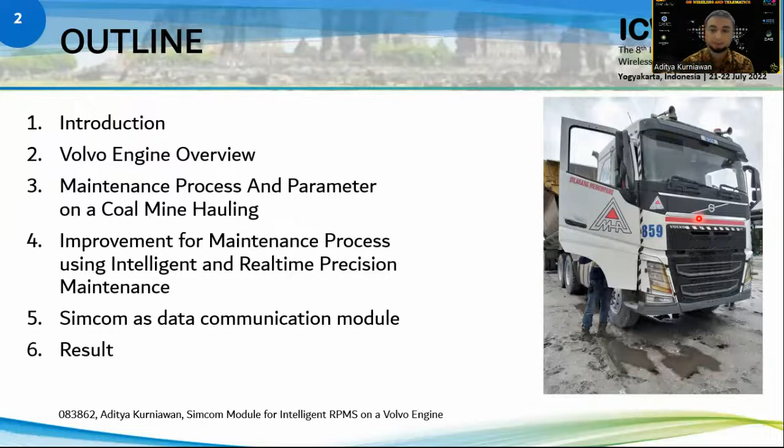So it stores the coal that is created by the industry, the mining industry. So this is just like a big storage.

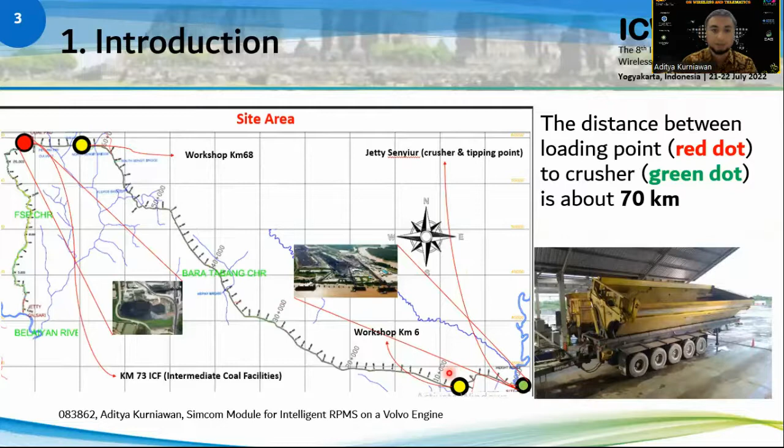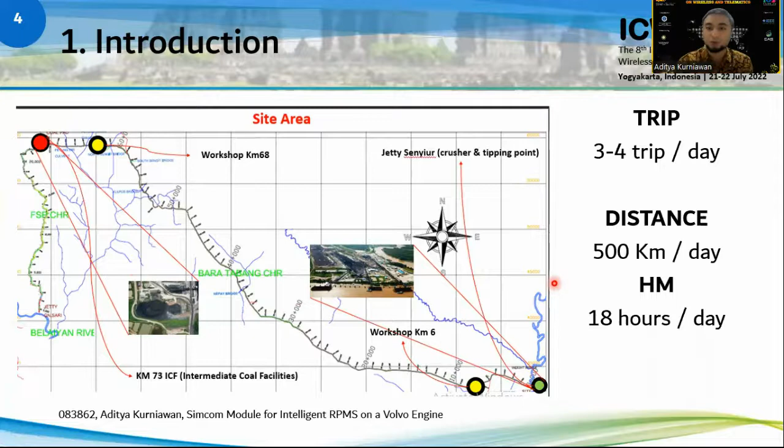And the distance between the loading point, the red dot, and the green dot is about 70 kilometers. The trip done by the unit has to move from the red dots, the intermediate coal facility or loading point, to the tipping point, about 70 kilometers, and it has to do this trip about 3 or 4 trips a day.

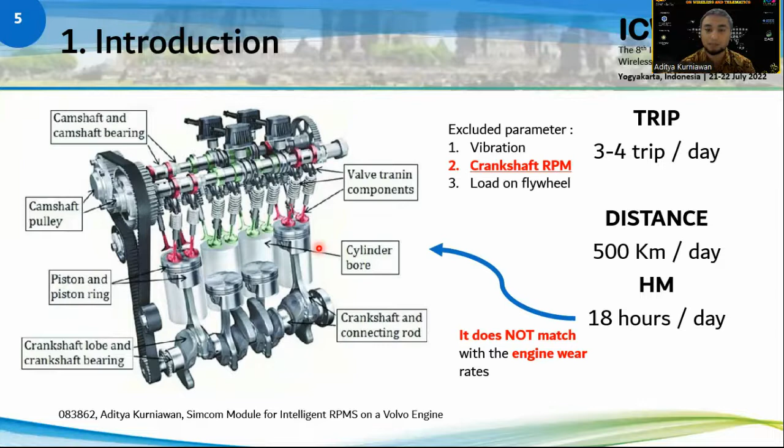And this is the Volvo engine. Inside the Volvo engine is installed what we call a magnetic pickup sensor. So the sensor will read the RPM of the engine, how many rotations the engine has made, and this engine speed - for example, this one, you can read it through the dashboard.

So you have to connect this dashboard with the laptop, with your computer and adapter from the Volvo Tech Tools, and then you can read this engine speed in RPM. So this value is actually what we're looking for.

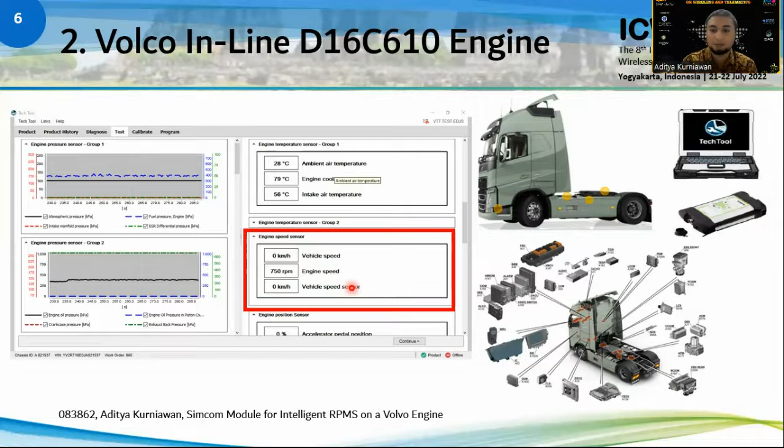In this research, we try to pick up this data of engine speed and send it wirelessly using the Simcom modules. This is how it works, the maintenance process and parameters before the implementation of this research.

The engine hour is just counting how many hours the engine is running. This is the input of the maintenance process, using schedules, then doing maintenance by the hours. For example, periodic service at 250 hours, 500 hours, 1000 hours, and so on. By using this data, the mechanics will do the periodic service based on the hours of the engine.

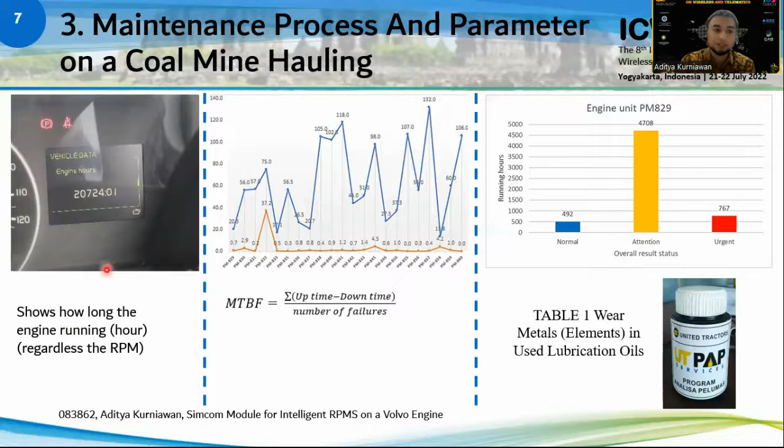Using this scenario, it will let the maintenance schedule be done correctly. So that is how the improvement works. We just try to replace the parameters from before. Before the implementation of the research, they used this hour meter, and now they use this new parameter.

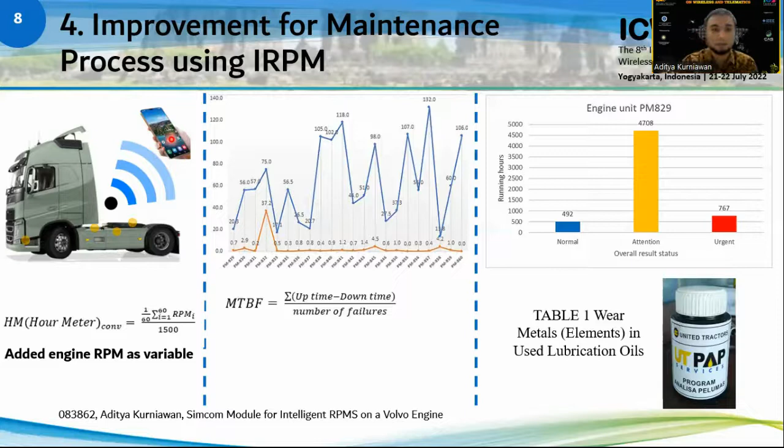The converted hour meter is directly taken from the RPM of the engine and from the sensor of the engine, and sent directly to the phone using an app, which we developed using Blynk apps like this.

This is the Simcom data communication module, which we install here inside the Volvo FH16 prime mover. We unplug this cable and put in a new module using the Node MCU here, and we take the sample of the engine RPM data.

We send it wirelessly using the Simcom A7600C1 LTE module, and use the RTC as the real-time clock. It will send the RPM data to the maintenance schedulers every 1 hour. So in 24 hours we have 24 data points of RPM and hours.

So the hours before will be corrected by the RPM of the engine, because before the hour meter doesn't really calculate the RPM of the engine. Now using this module, the hour meter is also calculating the RPM of the engine.

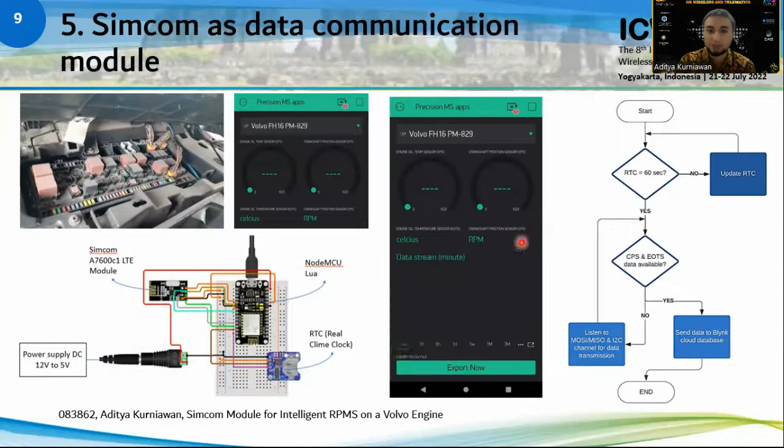After 1 month using this scenario, the value for MTBF, or mean time between failure, is getting better, about 1.8 hours. It means the unit is broken down rarely compared to before.

In a period of a month, in January 2022, the engine oil unit for PM 829 where we implemented this research has spent 100% of its total running hours in normal status. The month before, the unit was running with attention status, meaning the engine was in danger, but now it's in normal status compared to the year 2021.

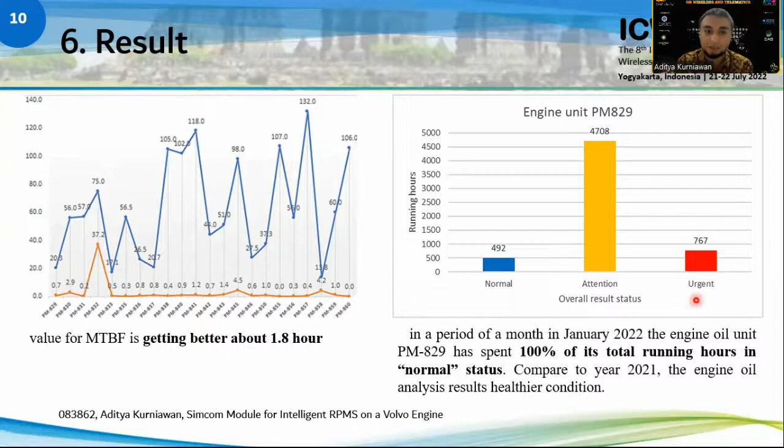The engine oil analysis results mean it is in healthier condition after the implementation of this research. The summary is the device prototype has been installed and tried in a real-world environment and has been proven to raise the value for MTBF by about 1.8 hours.

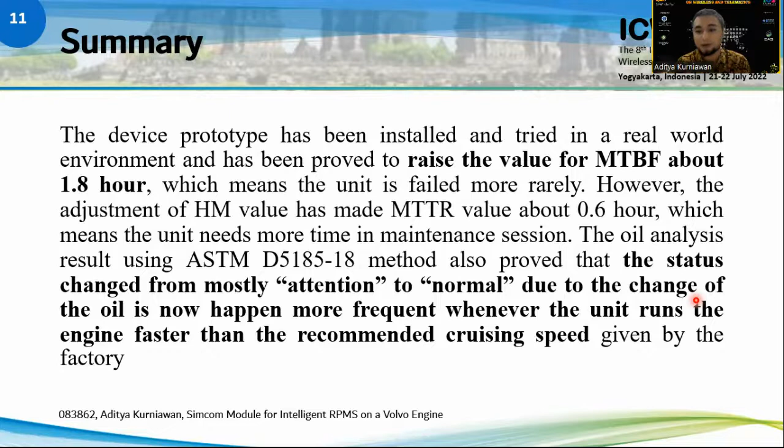The oil sample status changed from mostly attention to normal due to the oil change now happening more frequently whenever the unit runs the engine faster than the recommended cruising speed, which is 1500 RPM given by the factory.

So that is the suggestion, and for the next project we probably will try to detect the engine wear components further, so that the hour meter value could represent the real engine wear, by implementing the engine load parameters in real time.

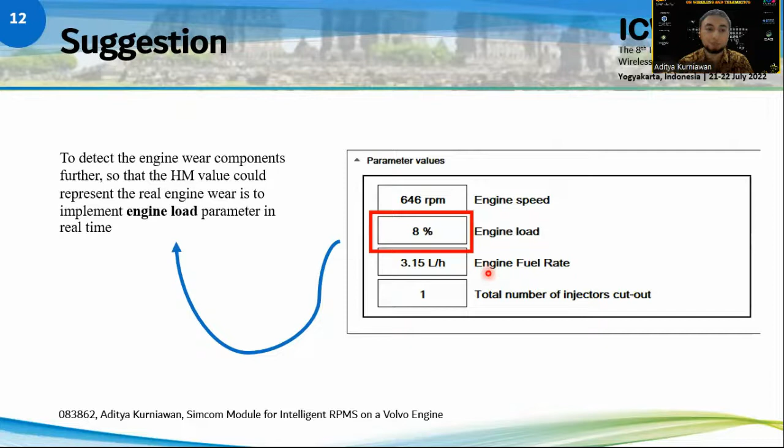So that is my presentation, and the end of my presentation. Thank you very much.